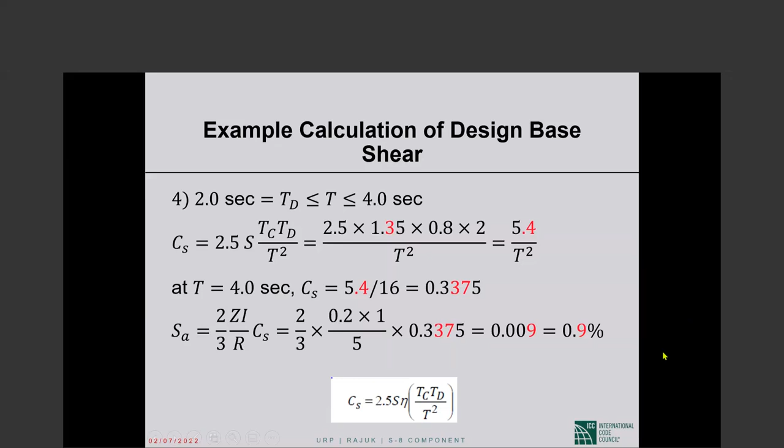Now, with the correction made, there is no difference between the BNBC number and the ASCE 7-05 number. Yesterday there was a line which I deleted that said this 0.9% is slightly different from the 0.83% we had derived by BNBC 2020. So please note that correction: BNBC and ASCE 7 give you identical numbers, as they should.

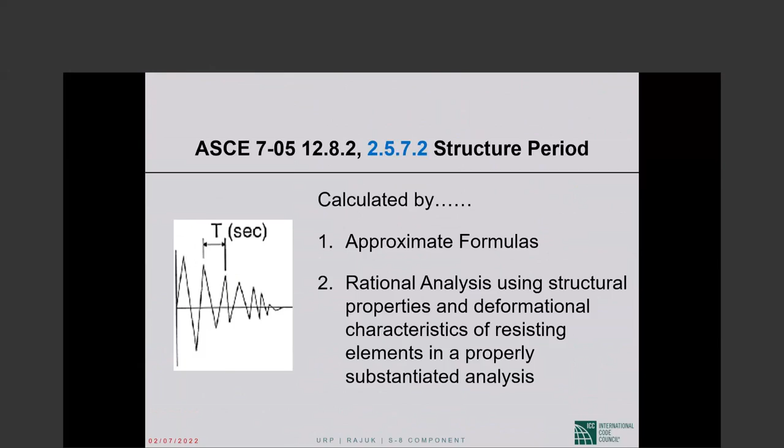Let me get to the place where we left off. This is the slide that I did not start on yesterday. Let me do it this way... I may have to go a long way back. That may not be worth it.

The base shear V is S sub A, the spectral acceleration, multiplied by the seismic weight W. The spectral acceleration S sub A, unless you are in the flat top portion of the spectrum, is inversely proportional to period or period squared. So we had to discuss the period itself.

And then in the equation for S sub A, we had R and I. So we need to discuss the R and the I coefficient. The seismic weight we have discussed already. So let us start with R.

R is given for each structure. Well, let me put it this way: in Table 12.2-1 of ASCE 7-05, a number of seismic force resisting structural systems are listed. The total number of systems is somewhere in the 70s. For each system, we are given three parameters: R, C sub D, and omega sub 0.

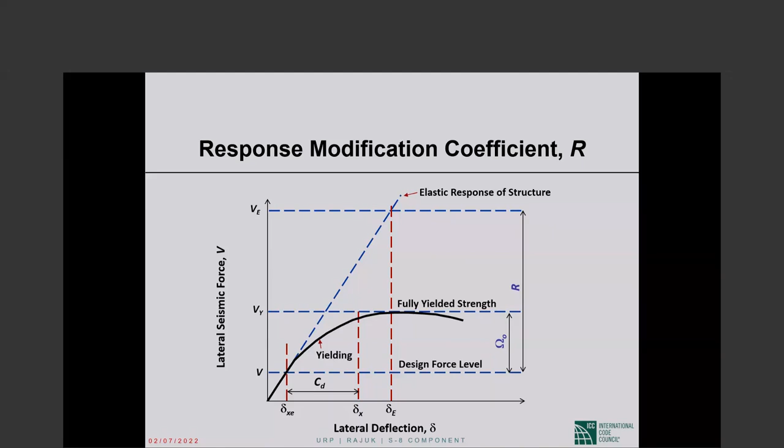So R, omega sub 0, C sub D. The R value — there are two kind of anchor values of R. Initially, those two values were set, and then pretty much all the other values were set by comparison with those two benchmark systems. That was in the early days, and now there is a lot more complication and some sophistication to it, but that's immaterial. It gives you an idea of the R values that we typically are dealing with.

R is 5 for a bearing wall system, and I defined it for you the other day — it is a system where shear walls carry gravity loads as well as lateral loads. So R is 5 for a bearing wall system with special reinforced concrete or reinforced masonry shear walls. That is kind of a benchmark value. And R is 8 for special moment frames of steel or concrete — that is another benchmark value. The other values were initially assigned by comparison with these two systems.

Is the system more comparable to moment frames than a masonry bearing wall system? Is it less deformable than a masonry bearing wall system, and so forth? So those are kind of benchmark values. The seismic force resisting structural systems — I spent quite a bit of time on the other day, so I assume that this was understood and remembered.

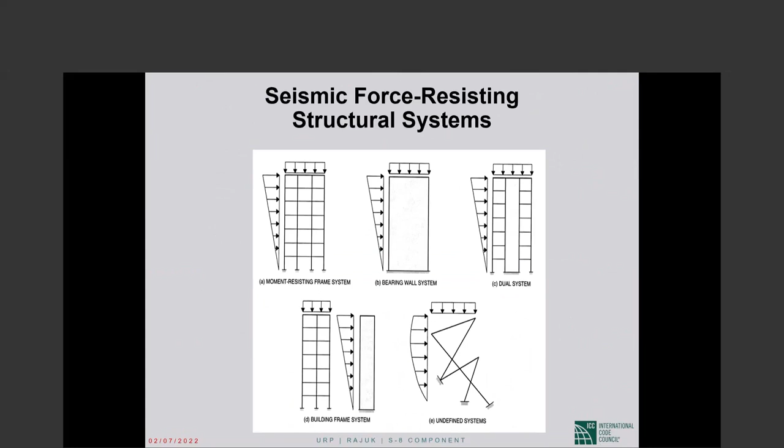We have moment resisting frame system, bearing wall system, and then combination shear wall frame systems, which can be designed as dual systems or building frame systems. Now, this is a portion of the R values table 12.2-1 of ASCE 7, which is BNBC table 6.2.19. So we have the basic seismic force resisting system. The detailing reference you could actually ignore.

Almost for all concrete systems, the reference is 14.2. Section 14.2 of ASCE 7 simply references ACI 318. So the detailing rules are to be found in ACI 318, and those rules I will discuss with you starting

tomorrow, actually. Okay. Then the R, omega sub 0, C sub D, and then there are height limits on almost all structural systems, with the exception of special moment frames of concrete and steel and dual systems utilizing special moment frames. Those are the only systems without height limits on them. Every other system has a height limit on it, and most of the time the height limits are in the higher design categories, not so much on B.

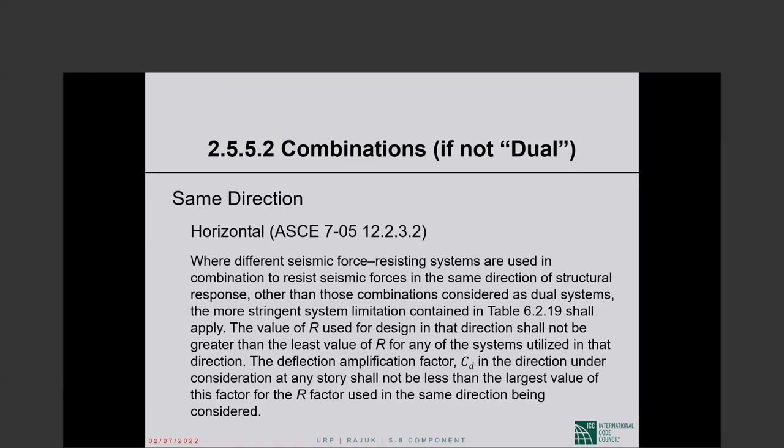In that case, you shall take the larger C sub D, or the largest C sub D, for that same R value. If you have 3 systems strung together that have the same R value, but the C sub Ds are different, you will take the largest C sub D. Okay, so this is a little bit of a tricky language.

Different systems in different horizontal directions, something like this. You have frames in one direction, shear walls in the other direction. Let us say these are special moment frames, and these are shear walls featuring special bearing wall system with special shear walls. The two directions are designed for their respective R, omega sub 0, and C sub D. There is no interaction.

At one time there used to be interaction, but for a long time we have gone by what is shown in the picture. In the bearing wall direction, we have R of 5, C sub D of 5, omega sub 0 of 2.5. In the frame direction, we have R of 8, C sub D of 5.5, omega sub 0 of 3. Very simple.

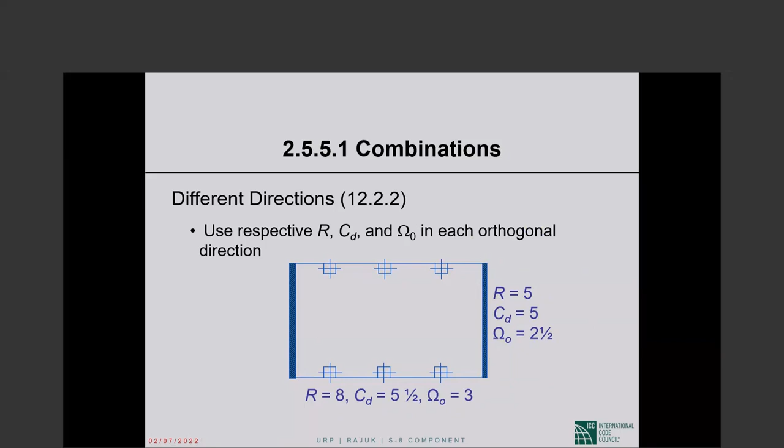The two orthogonal directions are independent of each other. The vertical combination of structural systems gets a little complicated. I didn't go there to save on time, but you can read up, or if you ask me, we will discuss that.

The importance factor I is 1.0 for risk category 2. It is, in your case, not risk category, it's occupancy category. I didn't notice that.

However many times I go through the slide sets, this always happens, and this always bothers me.

Occupancy category 2, which is standard occupancy, office buildings, apartment buildings, I is 1. The unimportant structures at occupancy category 1, the importance factor is also equal to 1. There is no importance factor smaller than 1. Category 3, essentially assembly buildings where a lot of people congregate in one space at one time, I is 1.25. And category 4, essential facilities, hazardous facilities, I is 1.5.

Now that gives us everything that goes into the design base shear equation. Having calculated the design base shear, we will, as I said, distribute it along the height of the structure in the manner prescribed by the code.

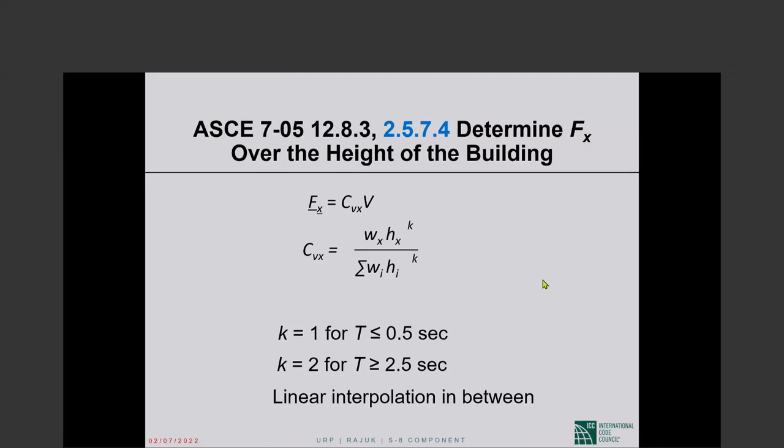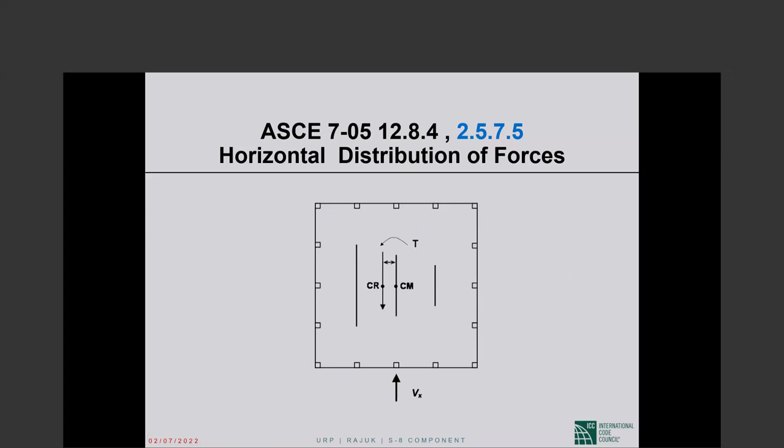The picture is simplified in the sense that torsion will not only go to these elements in the up-down direction; some of the torsion will be resisted by those frames too, which I did not indicate in the figure. So it's a simplistic figure, but the point I'm trying to make is made with it. So torsional moment due to difference in location of center of mass and center of rigidity must be considered for rigid diaphragms. Now, when the center of mass and center of rigidity coincide and there is no actual torsion, now called inherent torsion, we still consider an accidental torsion if our diaphragm is rigid.

The accidental torsion is the story shear multiplied by 5% of the plan dimension perpendicular to the story shear.

There was a time, a long time ago, when we used to design for the actual torsion subject to a minimum of the accidental torsion. But those days are long gone. We have for a long time been designing for the actual torsion plus the accidental torsion.

Not only that, the accidental torsion many times has to be amplified. For structures assigned to design category C, D, E, or F where type 1A or 1B irregularity exists—that's torsional and extreme torsional irregularity—ASCE 7-05 requires that the torsional and accidental torsional moments be amplified by a torsional amplification factor that can be up to 3.

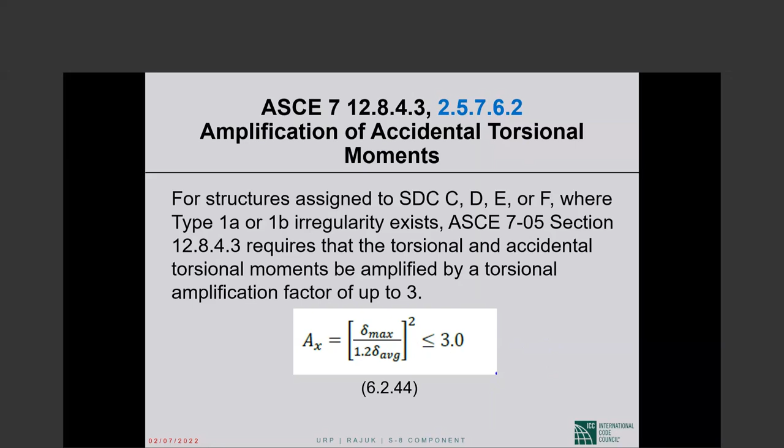Delta maximum is the maximum lateral deflection of the lateral force resisting system. Delta average is the average lateral displacement. This expression is pretty simple, and you will see a lot of this delta maximum and delta average in the next segment on irregular structures, so it will be very clear what A sub x is. It can be up to 3.

Overturning moment is simply the forces at the various floor levels multiplied by their height. If we are looking at overturning moment at the base, the overturning moment is the forces at the various floor levels multiplied by their heights above the base, as simple as that.

Now, the foundations of structures, except inverted pendulum type structures—this is like a water tank where all the mass is at the top—shall be permitted to be designed for 3/4 of the foundation overturning design moment M sub 0 determined using... so this is a fairly significant break that you get.

Foundation design does not have to be for the overturning moment at the base. At the soil-foundation interface, you can take a 25% discount on that. This is in ASCE 7-05 as well, section 12.13.4, this discount for foundation design.

That brings us to a major topic, one of the last—this is not the last in seismic, in the equivalent lateral force procedure, and some of these things extend beyond the procedure. In seismic design, we have drift check. The interstory drift, and I'll define it in a second, shall be within tolerable limits.

So, delta sub XE and Q sub E. The delta sub XE multiplied by C sub D gives us the estimated design earthquake displacement, as I mentioned. So delta sub X is C sub D times delta sub XE, but it is a little bit more than that. In delta sub X, we divide C sub D delta sub XE by the importance factor I.

We do that because we are going to check the interstory drift under drift limits, and the drift limits are a function of the occupancy of the structure. The drift limit for a hospital is half that for an office building. We should not penalize a hospital twice, once by instituting a tighter drift limit, and again by using an I factor of 1.5, thereby increasing the forces under which we calculate the drifts. So we take I out of the picture. Delta sub X is C sub D times delta sub XE divided by I.

That delta sub X at the top of a story minus the same delta sub X at the bottom of the same story is the interstory drift, delta sub X, in story X. That has to be less than or equal to the allowable story drift, delta sub A. The delta sub A is given in Table 12.12.1 of ASCE 7, Table 6.2.21 in BNBC 2020.

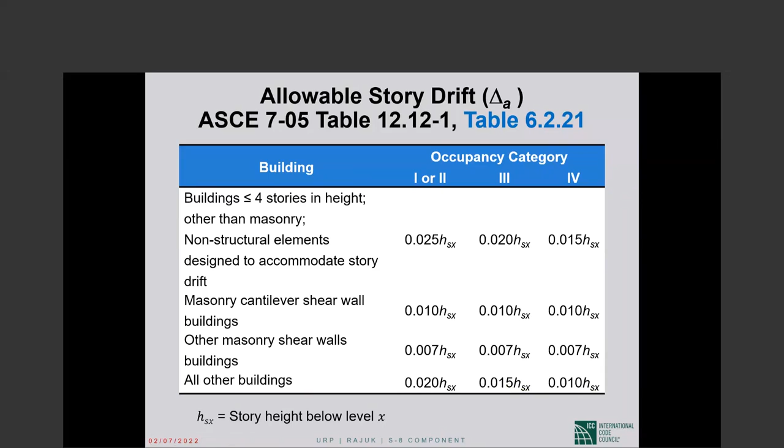Okay, the last topic. I am way behind, it's approaching one hour and I'm not done with what was supposed to be covered yesterday. So what will happen to today's segment, I don't quite know yet. We'll see. The time problem is just a problem, but we have to cover the material.

Okay, the strength design load combinations I discussed at length, one of these days, the days have gotten mixed up. These are the strength design load combinations of ASCE 7-05 and BNBC 2020, the same load combinations where we have eliminated F, the fluid pressure, H, the horizontal earth pressure, and T, the temperature effect. So these are the strength design load combinations of the code.

Two of the load combinations have earthquake effect E in them. This is what I call the additive seismic load combination. The gravity causes negative bending moment at a support section, and earthquake also causes negative bending moment. If we want to figure out the largest negative bending moment at that section, we will use that load combination. Gravity adds to the effects of earthquake.

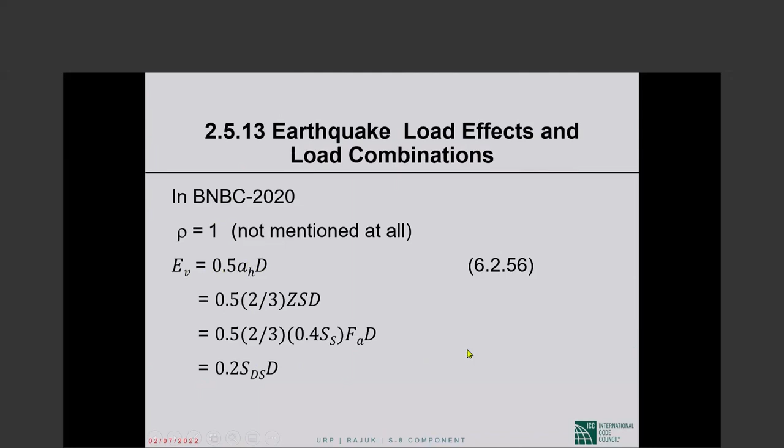In design categories D, E, and F, rho can be 1 or 1.3, as I mentioned already. So in Bnbc, I mentioned that rho is 1. E sub v is written that way, and I have explained why that is exactly equal to that. I wouldn't spend time on the details, it's very clearly spelled out.

So in the additive load combination, when we write E is equal to Q sub E plus 0.2 S sub ds times D, and we collect terms, what we have done is we have increased the dead load factor from 1.2 to 1.2 plus 0.2 S sub ds. So if S sub ds is equal to 1, we have made the dead load factor 1.4 by considering vertically downward earthquake forces.

If you take the example of Dhaka, which is zone 2, soil type S sub D is quite common, particularly on the north side. S sub ds then is 0.45. This value is given in Appendix C. For S sub ds of 0.45, 0.2 S sub ds is 0.09, and the dead load factor becomes 1.29, as you see here.

So in Dhaka, structure shall be designed for this load combination. The load factor on live load, I have mentioned repeatedly before, is 0.5 unless you are designing a parking structure, a place of public assembly, or an area supporting more than 100 pounds per square foot of live load. That's what is said here.

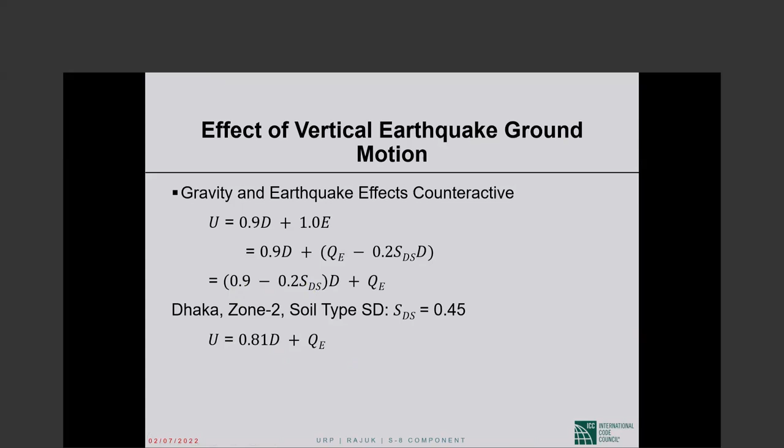This is pretty much the final topic before I go to today's session. There are the regular load combinations that we saw, and then there are load combinations with overstrength factor, as they are called, in ASCE 7 as well as Bnbc 2020. Overstrength factor load combinations.

The first and foremost and most important thing I am going to tell you about the load combinations with overstrength factor is they must be used where required by ASCE 7 or Bnbc 2020, but more importantly, they must not be used where not required by the code. You cannot just willy-nilly use them at your whim. That will be to the detriment of your structure. So these load combinations with overstrength factor shall be used where required and shall not be used where not required. The second part is more important than the first part, I would say. Please do not use them where they're not required.

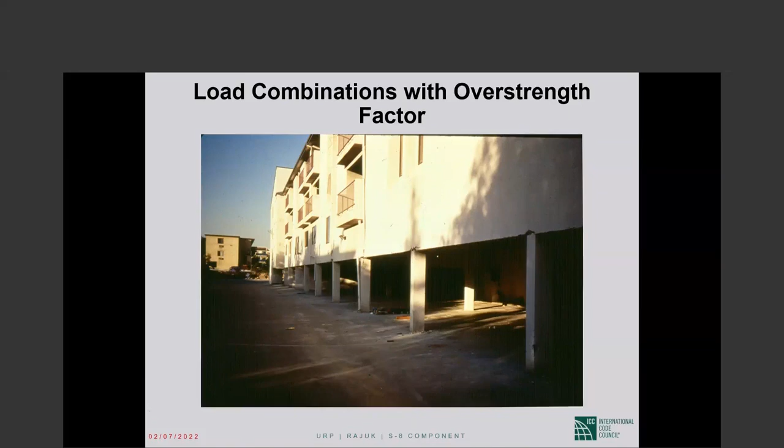This is the famous Olive View Hospital after the 1971 San Fernando earthquake. I showed you a picture the other day where the ambulances were pinned down by the canopy that had fallen on them. This is a side face of the building or whatever.

These columns are supporting stiff shear walls above, as you can see very clearly. The only reason the building is standing up is that, for reasons unknown to me, the central columns were spirally reinforced with a very tight pitch to the spiral. So those columns were inelastically deformable and are holding the building up.

These columns are typical of pre-1973 UBC construction: plenty of longitudinal steel, but no transverse reinforcement, or very little. So those columns have completely failed, as they are expected to.

Today's design, all four of those columns, will be designed for overstrength using load combinations with overstrength factor, and the entire length of the column will be detailed for ductility. We will have special detailing. We do both of those things, and so in two different ways, columns supporting discontinued shear walls today are much superior to what we used to build before 1973.

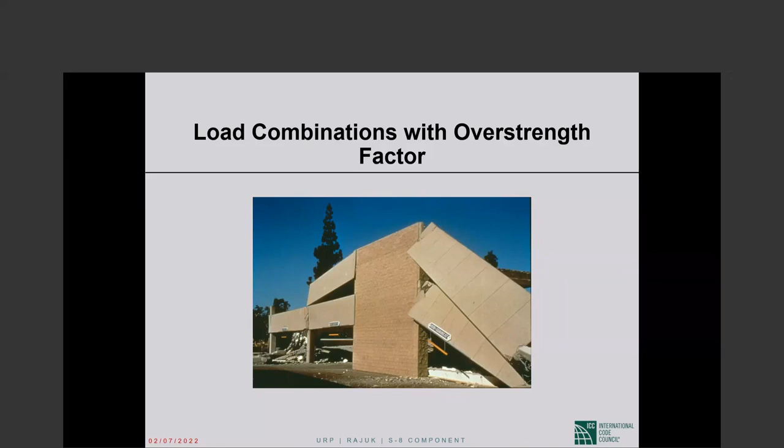From that point on, this was 94, 97 UBC, we already required collector elements to be designed using what we used to call special seismic load combinations back in those days. This is vitally important: collector elements need to be designed using the load combinations with overstrength factor. These are the special seismic load combinations, or load combinations with overstrength factor, as we call them now.

This is the same as the regular load combinations, except here we have omega sub 0 rather than rho, the redundancy factor. The redundancy factor is 1 or 1.3 if your seismic design category is D, E, or F. Omega sub 0, on the other hand, is given in the R values table, and if you look at the table, the number is 2, 2.5, or 3. So we are amplifying the effect of design base shear by a much larger multiplier and then adding to gravity effects.

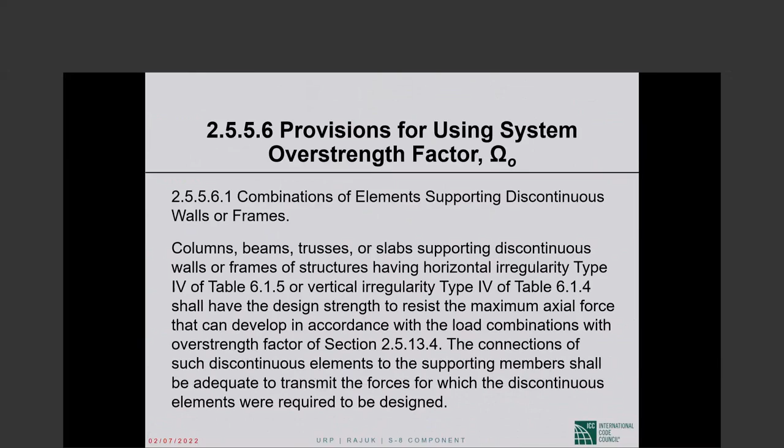So this is the difference between regular seismic load combinations and the load combinations with overstrength factor. Where does the BNBC require you to use special seismic load combinations? As I said, the cantilever column base is not there, but elements supporting discontinuous walls or frames is very much there. I will not read the text, but the important thing is it's there.

Then this talks about collector elements in a roundabout way. There is a 25%... anyway, all of this will come up. I think maybe in the next segment we will discuss what is said here, but not now. This is telling you that the collector elements, in a roundabout way - you'll be very confused if you read it - but it is essentially telling you to design the collector elements using the load combinations with overstrength factor.

Actually, this is much more so. This section I will discuss later, and when I do, I will refer back to the section of BNBC. I will tell you that this is what I kind of skipped. This tells you to design the collector elements using load combinations with overstrength factor.

And then something that is not in ASCE 7, it is in the IBC: batter piles, which are inclined piles. Batter piles and their connections shall be capable of resisting forces and moments from the load combinations with overstrength factor. So batter piles you shall also design using load combinations with overstrength factor.

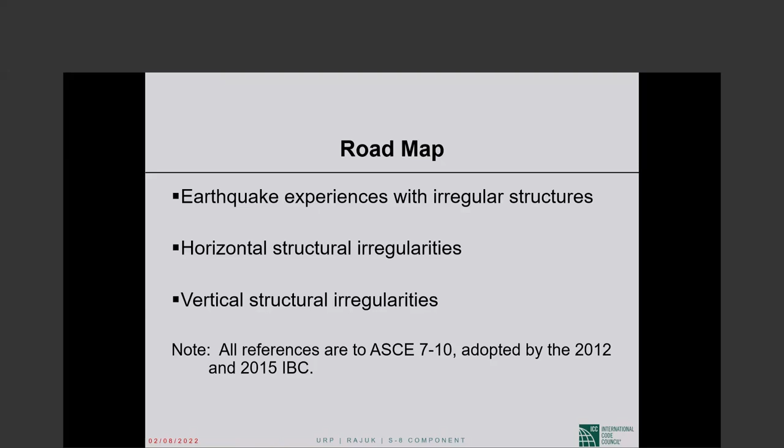ASCE 7-10 was adopted by 2012 and 2015 IBC. I did that because there were some beneficial changes or clarifications made in ASCE 7-10. It's not very different from ASCE 7-05, but a couple of things were improved, so I thought that it was preferable.

Configuration: the word means a relative arrangement of parts, something produced by such arrangement. This is the dictionary meaning - relative arrangement of parts, something produced by such arrangement.

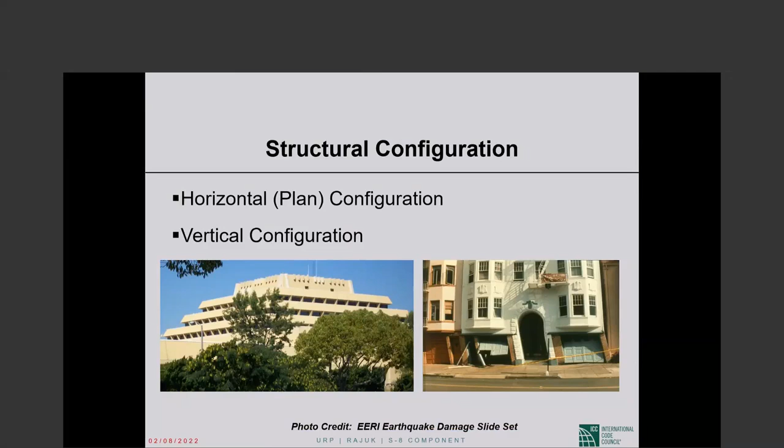In the structural design we do, the plan configuration of a structure and the vertical configuration of a structure, how a structure is put together in the horizontal direction and how it is put together in the vertical direction, both matter. Both become pretty important, so we consider both.

The configuration of a structure can significantly affect its performance during a strong earthquake that produces the ground motion contemplated in the IBC and ASCE7, same as BNBC 2020.

The picture shows the Ministry of Transportation and Telecommunication, Mexico City. I showed you this picture the other day. This was in the wrong height range, so it was kind of a resonant response, but the L shape of the building did not help. That meant a lot of torsion, which always hurts.

ASCE7 seismic design provisions were developed basically for regular buildings. This is something we need to understand—everything was developed basically for regular buildings. Past earthquakes have repeatedly shown that irregular buildings suffer greater damage, incomparably greater sometimes than regular buildings. This happens even with good design and construction. It is the configuration that is the problem, not the design and construction. By proper design and proper construction, you can improve things, but the problem remains.

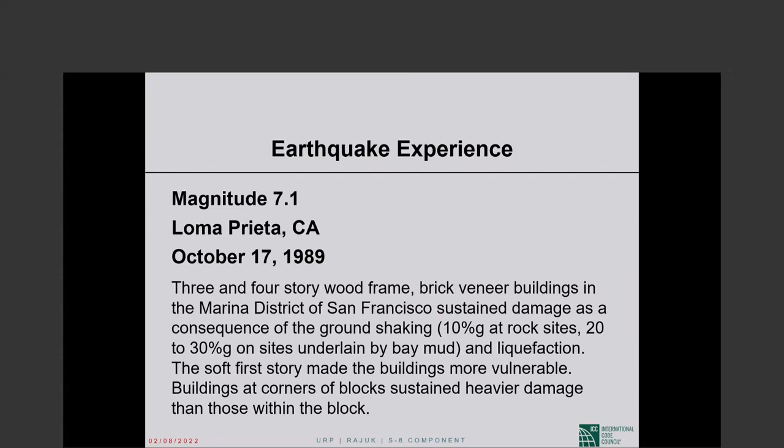So irregular buildings attract more damage to themselves. Some examples: the so-called Loma Prieta earthquake of 1989. This was the San Francisco area earthquake, the last significant one in that area, magnitude 7.1.

What we saw in that earthquake—this is the Marina District as it is called. This was built on fill. These buildings, when they were built, there were no automobiles, so there were no garages. When cars came, people created openings in the ground story to have garages. The garages were created by removing walls after the buildings had been constructed, and that produced soft stories. These buildings with soft stories did not do well at all in the Loma Prieta earthquake, as you would imagine. So the irregularity was the problem.

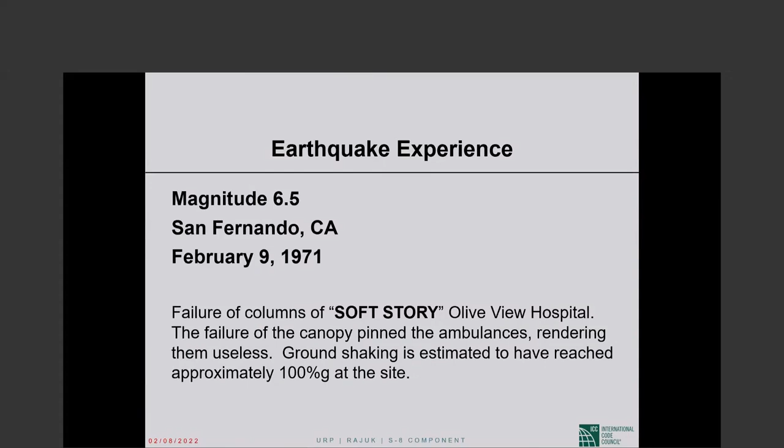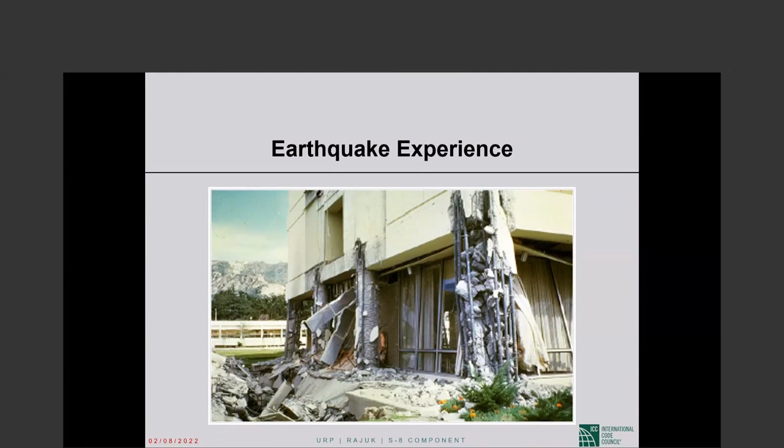This is the San Fernando earthquake that you keep hearing about, 1971. This is the building that I just showed you, the other face, the left face. These are the ambulances that were pinned—this canopy fell on the ambulances. But I just showed you this picture. The problem was the soft story, the columns supporting the discontinued shear walls. If the columns had been designed and detailed properly, the building probably would have stood up. That's besides the point. The point is that the irregularity poses a challenge—it causes a problem that has to be addressed.

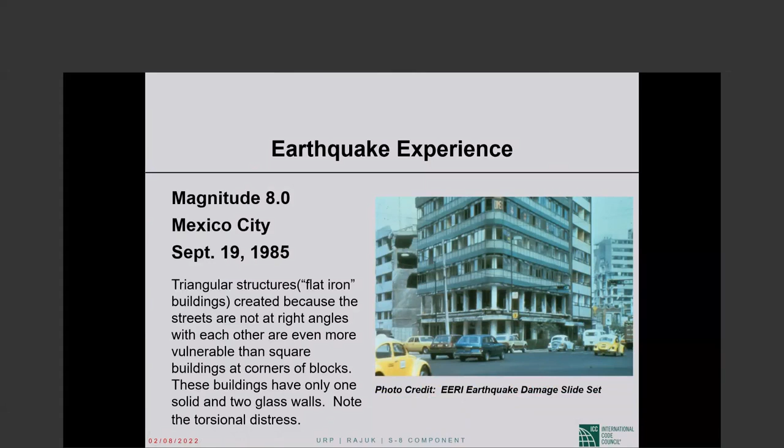Mexico earthquake, 1985. The earthquake—which earthquake—is incidental; the building is what matters. This is even worse. This is a triangular building, so only the back face has walls. The other two faces do not have walls. They are much more flexible, and the resulting torsion causes a lot of problems for these buildings.

You can design against it, but the problem is very real. In a regular structure, inelastic demands produced by strong ground shaking tend to be well distributed throughout the structure, resulting in a dispersion of energy dissipation and damage. That is a very key thing to understand. In irregular structures, inelastic behavior can concentrate in the zone of irregularity, resulting in a rapid failure of structural elements in these areas. This is the difference between regular and irregular buildings.

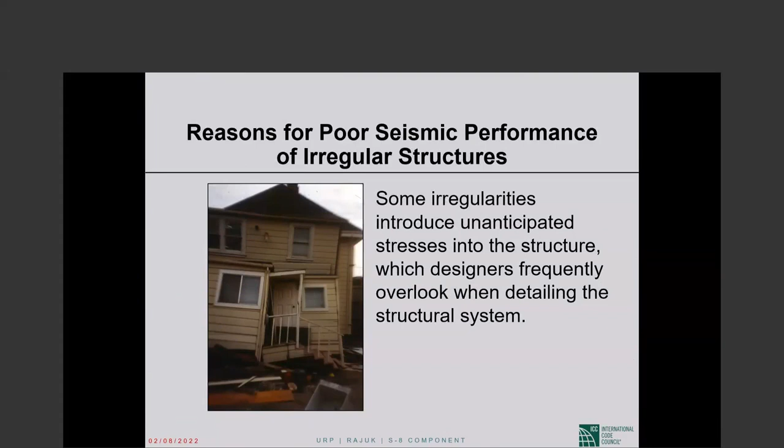Some irregularities introduce unanticipated stresses into the structure, which designers frequently overlook when detailing the structural system. This is a building out of Japan, I believe, after the Kobe earthquake. That's where I think I took that picture.

So, reasons for poor seismic performance of irregular structures: elastic analysis methods, which is what we almost always use as the basis of design, whether static or dynamic, doesn't make a difference. Elastic analysis methods typically employed in structural design often cannot predict the distribution of earthquake demands in an irregular structure very well, leading to inadequate design in the zone of irregularity.

Consider the building with the two open faces and two back faces with walls that I mentioned. When the shear wall is damaged, the structural behavior is not regular anymore. So how would you find out from elastic analysis what is happening subsequently to the shear walls, and more importantly, to the columns? You cannot—there is no way you can figure out the actual force distribution after the behavior of the structure has become inelastic.

The code regulations concerning irregular structures were introduced in the 1988 edition of the Uniform Building Code. The types of irregularities that you see date back to then. There have been a couple of modifications, but only a couple. This has been a very stable part of the code.

The way ASCE 7 handles it, we have definitions, and then there is a table that tells you, if you have, let's say, torsional irregularity, which particular sections of ASCE 7 get triggered. So if you have torsional irregularity, the table will tell you to go to the section that has restrictions on analysis procedures. And when you go there, you will see that you have to do dynamic analysis—static analysis will not do, for instance.

Okay, I want to take you through all of that—what is the definition, and what does ASCE 7 ask you to do if you have that particular type of irregularity.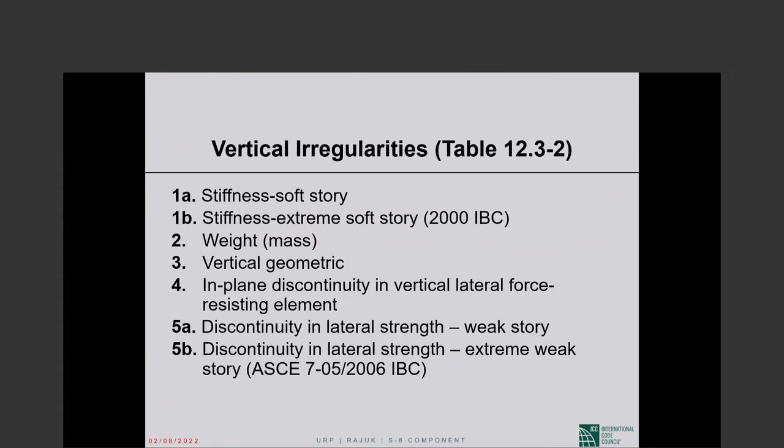The vertical irregularities are: stiffness irregularity, extreme stiffness irregularity, soft story, extreme soft story, weight irregularity, vertical geometric irregularity, in-plane discontinuity, discontinuity in lateral strength or weak story, and extreme weak story. In our seismic design code master, I wanted to show how much space we have devoted to this topic of irregular structures—it is that important.

So we will start with the very first type, 1A, torsional irregularity, and look at the definition and also what ASCE 7 requires us to do when we have torsional irregularity.

So, the definition: this is the undeformed structure, and this is the structure after the earthquake has caused displacements and so forth. The maximum displacement is at this corner, denoted by delta maximum, and delta average is the average displacement of this corner and that corner. If the maximum is less than or equal to 120% of the average, we don't have any torsional irregularity—it is considered a regular structure.

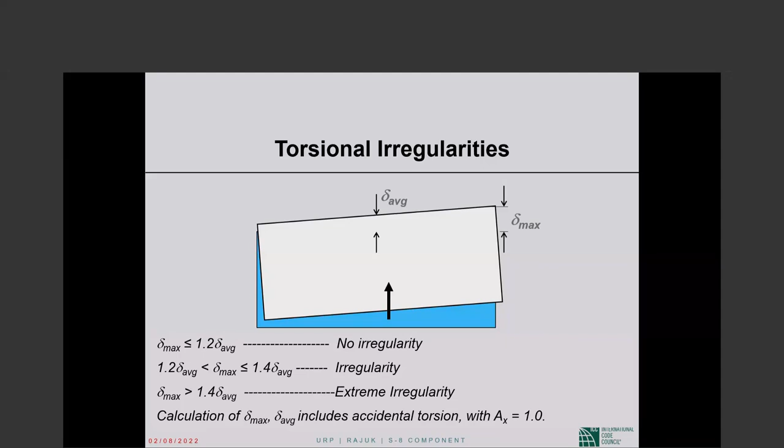If the maximum is between 120 and 140% of the average displacement, then we have torsional irregularity type 1A. If delta maximum is larger than 140% of delta average, we have extreme torsional irregularity. So we have defined torsional irregularity 1A and extreme torsional irregularity 1B with this one picture: up to 1.2, no irregularity; between 1.2 and 1.4, type 1A; above 1.4, type 1B.

Same thing with an L-shaped building, same idea. Delta A is now the maximum, and the average is delta A plus delta B divided by 2. If this condition is true, then we have type 1A irregularity as shown in this picture.

If we have 1A irregularity, then those are the provisions of ASCE 7 that get triggered—we have to abide by all of those requirements. The requirements sometimes apply only to certain seismic design categories, not all. This requirement applies in seismic design categories D through F; this one, however, B through F. So that column is kind of important.

Now here comes the long paragraph in the NBC.

Before, when we were discussing collectors having to be designed for load combinations using the overstrength factor, there was a paragraph I said would come up later, and this is now that later. This says 25% increase in seismic forces in connections, diaphragms and collectors. There is somewhere else where you will get more elaboration on that. I don't remember exactly now, I have 7 or 8 seismic segments I was preparing.

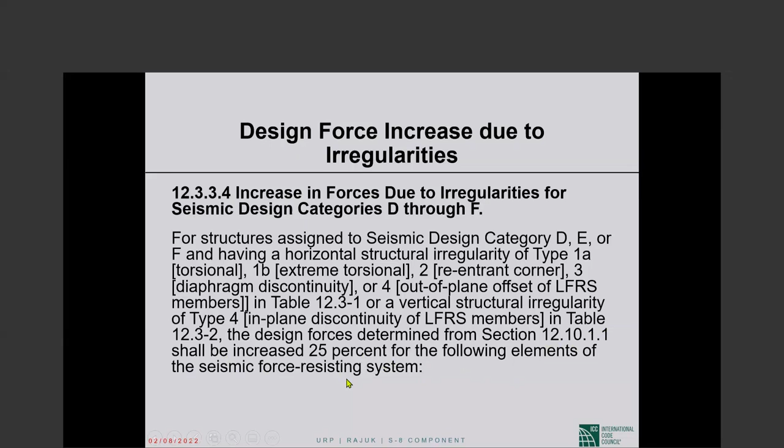The design forces determined from section 12.10.1.1 shall be increased 25% for the following elements of the seismic force resisting system. This is what I wanted you to see. So where do you have to increase the design forces by 25%? Connections of diaphragms to vertical elements and collectors.

The very nice picture, this was in the previous segment. Do you remember the picture of the diaphragm I showed to explain what collectors are? So the diaphragm is connected to the collector where there is no shear wall. The diaphragm is connected to the shear wall where there is a shear wall. Connections of diaphragms to vertical elements, meaning shear walls or frames, and to collectors - those connections have to be designed for 25% more forces. And then the collectors themselves, and their connections, including connections to vertical elements of the seismic force resisting system, the collector to shear wall connection.

Now, there is a significant exception: forces calculated using the seismic load effects including the overstrength factor. So if you are in design category D, the collectors and their connections have to be designed using the load combinations with overstrength factor, and in that case the 25% requirement goes away - it is not on top of omega sub zero. So most of the time, at least that part of the requirement will be moot in design category D.

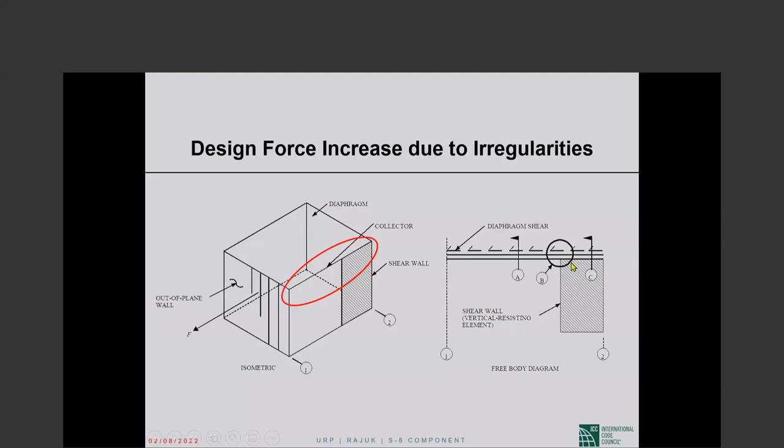So this is the diaphragm to collector connection, A. This is the collector to shear wall connection. I'm sorry, let me correct myself - this is diaphragm to collector connection, this is the collector to shear wall connection, and this is the diaphragm to shear wall connection. Are you with me? This is diaphragm to collector connection, this is collector to shear wall connection, and this is the diaphragm to shear wall connection - A, B, and C.

So A is diaphragm to collector connection, as shown in the picture - this is the collector, this is the diaphragm, the design forces have to be increased 25%. This is the collector to shear wall connection, so this connection, the forces have to be increased 25%. And this is the diaphragm to shear wall connection - this is the shear wall, this is the diaphragm, this connection has to be designed for 25% higher forces.

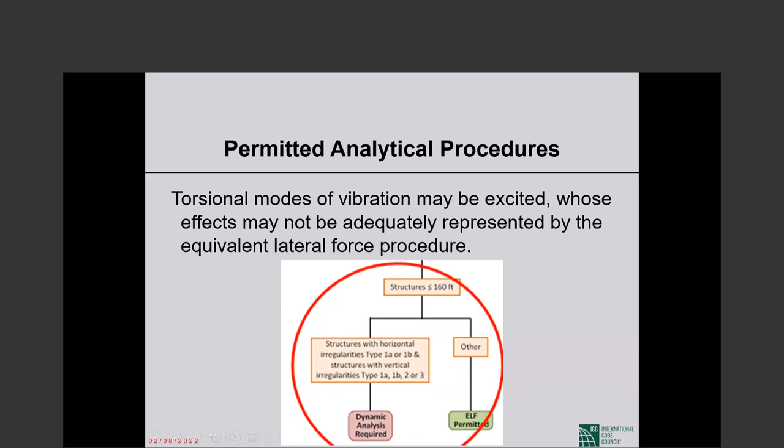Okay, second thing you have to look at, if you go back to the table - and I won't go back every time, but first time - the next thing you have to look at is table 12.6-1, which is the permitted analytical procedures. We went over that yesterday. If you have torsional irregularity 1A or 1B, that is one of the bad irregularities that will trigger dynamic analysis even for shorter buildings. So if you have torsional irregularity, you have to look at this table and do dynamic analysis, because torsional modes of vibration may be excited whose effects may not be adequately represented by the equivalent lateral force procedure.

You just saw that picture explaining torsion, and I had this page on the amplification of accidental torsion. The first thing is a 25% increase. Second, look at the table of permitted analytical procedures. Third is the amplification of accidental torsion. This is required for type 1A and 1B buildings.

So this is another section that is triggered, 12.8.4.3. You have to design torsionally irregular buildings for the inherent torsion plus the accidental torsion amplified by the torsional amplification factor given here, and that factor can be up to 3.

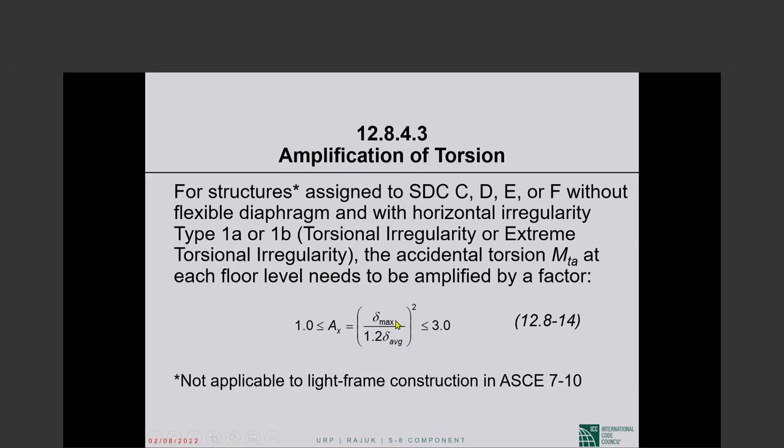By now you know delta maximum and delta average very well. So this is just illustrating delta maximum and delta average and the definition of the accidental torsion amplification factor, or the torsional amplification factor. I don't know why it's called accidental.

The next section that is triggered is 12.8.6. What this covers is, if you have torsional irregularity, interstory drift. Interstory drift, remember, is deflection at the top of a story minus deflection at the bottom of the story. Typically, we calculate the deflection at the center of mass. But that is not good enough if you have significant torsion.

So for structures assigned to seismic design category C, D, E, or F having horizontal irregularity 1A or 1B, which would indicate significant torsion, the design story drift shall be computed as the largest difference of deflections of vertically aligned points at the top and bottom of the story under consideration along any edges of the structure.

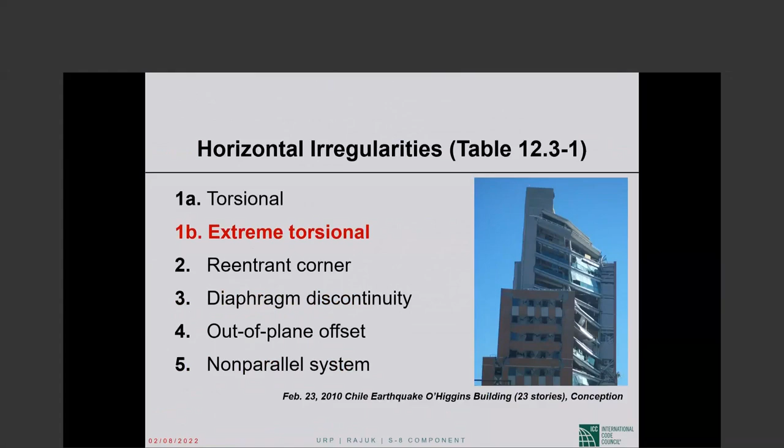So that was the entire table. This is the same table, I'll go back, I'm not skipping. We looked at the 25% increase, the permitted analytical procedure, and the 3D structural model requirement. There's nothing more to elaborate on that. If you have torsion, you need a 3D model—2D simply doesn't do it. That should be kind of intuitive.

Amplification of accidental torsion, we talked about. Design story drift based on largest difference in deflection along the edges, we just talked about. The last item says that even when you do nonlinear time history analysis, you will have to do 3D—2D will not be sufficient anymore.

Okay, we go from type 1A to type 1B. Now the maximum is more than 140% of average. This irregularity is prohibited in seismic design category E and F. You do not have that in Bangladesh, so you don't have to worry about it. But in near fault areas, this is simply not allowed to be built.

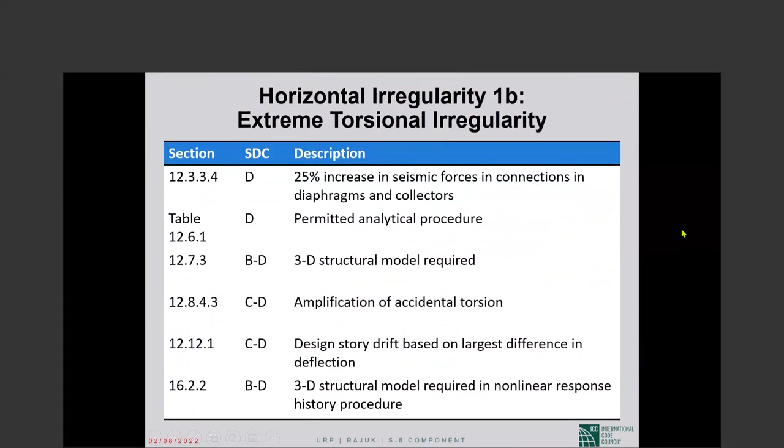The same restrictions apply, the same table—1A and 1B, no difference. The difference is that outright ban: you cannot do it in near fault areas, in seismic design category E and F.

This probably goes into a little too much detail, a supplement to ASCE 7-10. ASCE 7 says that the redundancy factor rho shall not be taken equal to 1 for structures assigned to seismic design category D having extreme torsional irregularity—rho shall be 1.3. I won't go beyond that. This goes into ASCE 7-10 supplement material for you, for the future.

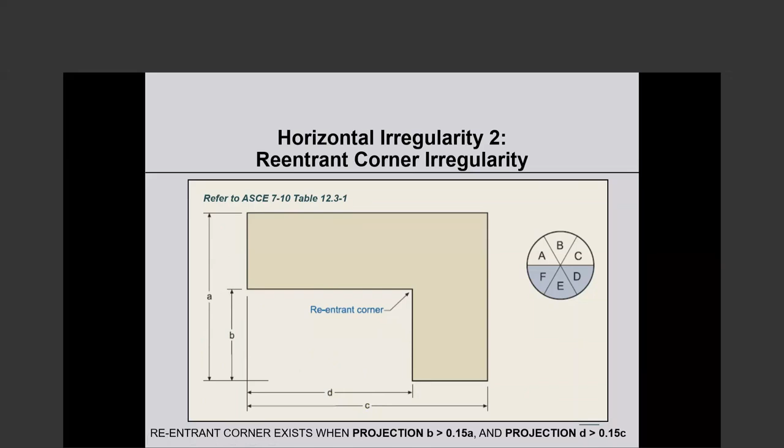Okay, re-entrant corners—something that looks like this. A re-entrant corner exists when projection B, this distance, is larger than 15% of A. So look at A, look at B. If B is larger than 15% of A and D is larger than 15% of C, then you have re-entrant corner irregularity. This is the definition, and these are the restrictions.

The 25% increase in seismic forces in connections and diaphragms, and the permitted analytical procedure—if you have horizontal type 2 irregularity, that is a bad irregularity, and you will have to do dynamic analysis even for shorter buildings.

The re-entrant corner irregularity—why we are so careful with it—is that re-entrant corners may form coupled wings which may respond in an opening and closing fashion. That is very easy to visualize. This may give rise to high stresses in the vicinity of the re-entrant corners.

Diaphragm discontinuity irregularity exists when the area of opening is larger than 50% of the area of the diaphragm, or effective diaphragm stiffness changes more than 50% from one story to the next. This effective stiffness is not defined, which makes it a bit of a problem. But anyway, that's the significant change in diaphragm stiffness from one story to the next.

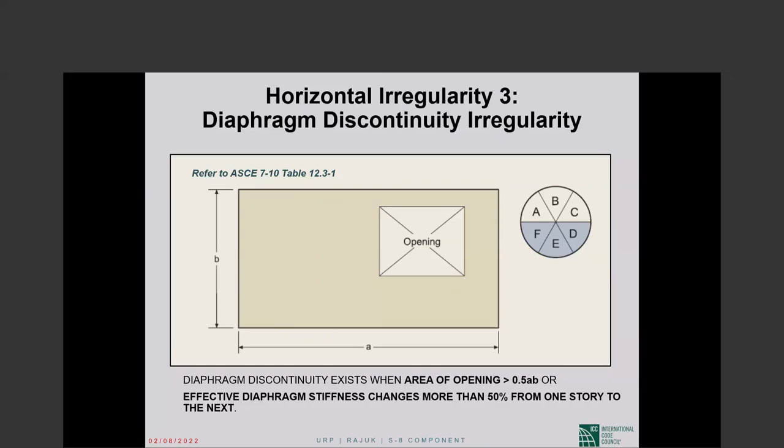This irregularity is not very well defined, and it has undergone changes in subsequent editions of ASCE 7 that I cannot go into today. But in ASCE 7-05, you will see exactly what you see here. No change from 7-05 to 7-10. So 50% or more of the diaphragm is an opening, or effective diaphragm stiffness changes more than 50% from one story to the next. What you consider effective is up to you. If you have diaphragm discontinuity, the regulations triggered are again a 25% increase in seismic forces and the permitted analytical procedure.

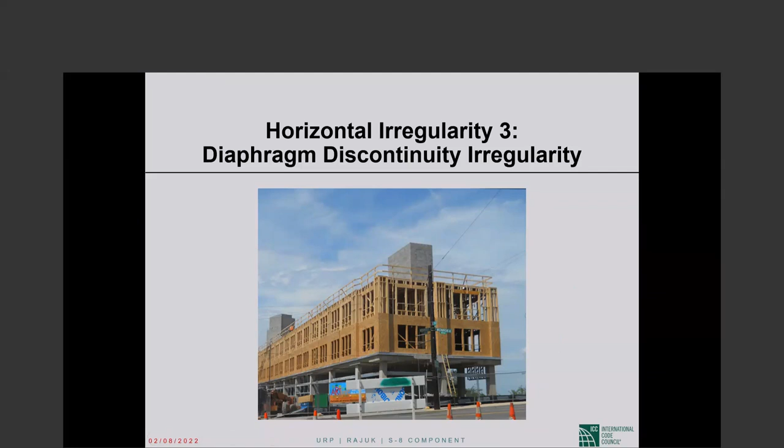Diaphragm discontinuity irregularity, continuing with our discussion. This is very, very common now in the US: a wood structure sitting on a concrete podium structure, as they are called. This concrete structure is not as stiff as they usually are, but the point is that this diaphragm is concrete, while those diaphragms are made of wood, and you definitely have more than 50% change in stiffness. So we are looking at this diaphragm discontinuity irregularity.

These are questions that we got from wherever. If the roof diaphragm has an opening in it, which results in the stiffness of the second floor diaphragm being 50% stiffer than the roof, does that make it irregular? The plan irregularity definition says story to story. We said yes, it would be considered irregular. It doesn't matter whether it's floor or roof.

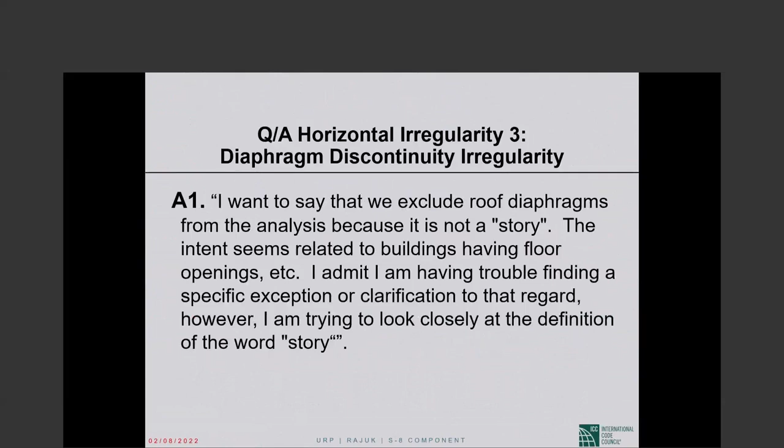The question and answer I think I'm going to skip in view of our time situation. You can easily read them. And sometimes the context is probably a little too American, may not apply to you. The second question we spent a lot of time on, because this is an important question here.

In office buildings, the floors are typically steel. Well, first of all, many office buildings are made of steel, and the floors are steel decks topped with concrete. But the roof level steel deck is typically not topped. We're not going to do anything on the roof anyway, so there's no reason to put a concrete topping. So are all those buildings irregular? The untopped roof diaphragm is definitely much less stiff than the topped floor diaphragms. Are all those buildings irregular? Opinions are expressed that you can read. And that situation probably does not exist in Bangladesh, at least to a significant extent, so don't worry too much about it.

Next, type 4 is out-of-plane offset irregularity, and I think the pictures are quite clear. ASCE 7-10 clarifies that at least one of the vertical elements has an offset, so there is discontinuity in vertical elements of the lateral force resisting system.

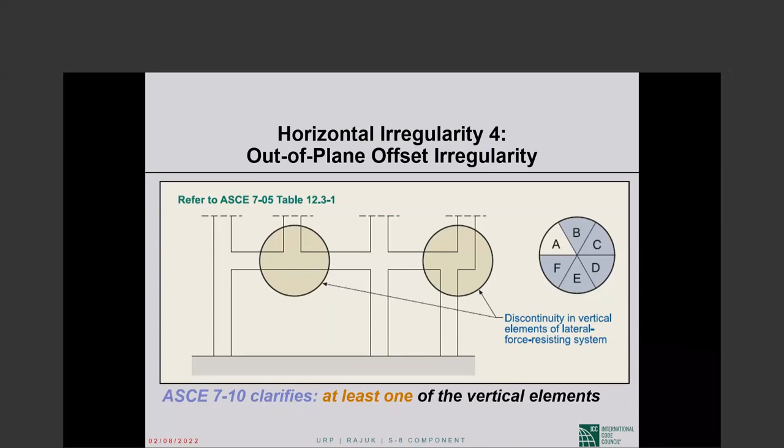This is a very graphic picture that comes from FEMA, and it makes an important point. This shear wall was coming down, but then it makes an offset and comes down a different line. Now this shear has an opposite shear at the base of the wall, and that shear will have to go from here to there through the diaphragm. So there will be this shear, there will be that shear, and then there will be shear in the diaphragm.

The diaphragm shear - this is called a transfer diaphragm when this happens, when the diaphragm has to transfer the shear from the base of this wall to the top of the continuing wall. This transfer diaphragm has to be treated properly in design, and those transfer forces have to be treated properly. But anyway, this is out-of-plane offset irregularity.

This is a nice looking building where you have a very significant offset of the seismic force resisting system. This wall was coming down, and I don't even know where it's continuing along this line or anyway - so there is discontinuity in that shear wall.

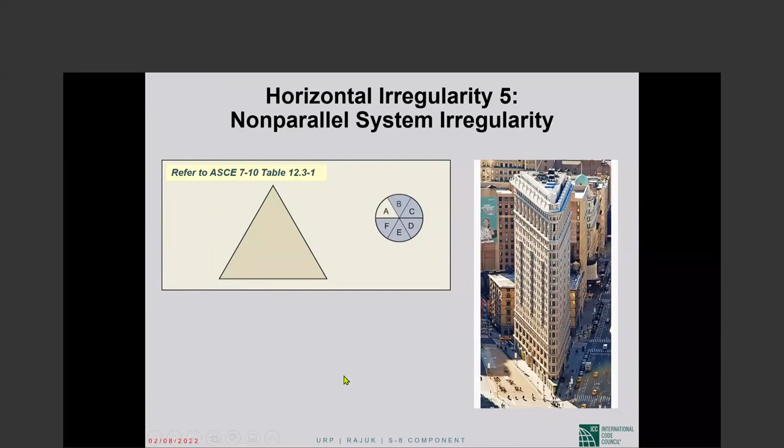This building, I do not know what the system is, but if you have a triangular shear wall in a building, that would be non-parallel seismic force resisting system. The definition is: non-parallel system irregularity exists when the vertical lateral force resisting elements are not parallel to the major orthogonal axis of the seismic force resisting system.

It used to say 'or symmetrical about,' and that was deleted in ASCE 7-10, which is the main reason I went with ASCE 7-10. This is very important - 'or symmetrical about' didn't make any sense whatsoever. You still have it in BNBC. Do not use it, I consider it deleted, doesn't make any sense. Non-parallel system irregularity exists when the vertical lateral force resisting elements are not parallel to the orthogonal axis.

When you have non-parallel system irregularity, we have to use orthogonal load combinations. I need to go into that. This is something else that is not covered in BNBC, but I'll cover it right here, not another day.

Permitted analytical procedure, whether you have to do dynamic analysis or equivalent static, we will do. A 3D structural model would be required, whether you do regular analysis or nonlinear time history analysis.

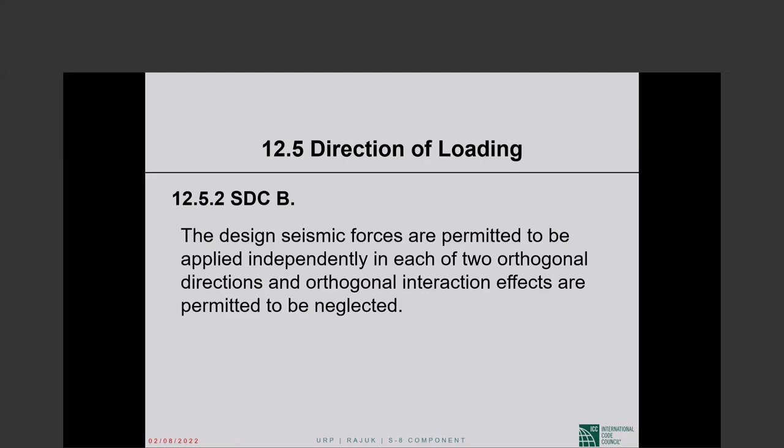Design category C: what is true of design category B is also true of design category C, and something else is true. So design category B, independently in each orthogonal direction, was fine. Design category C, that is still fine unless you have a structure that has horizontal irregularity type 5, non-parallel seismic force resisting systems that we are discussing. If you have that...

Even in seismic design category C, you shall use one of the following procedures. The first procedure is the orthogonal combination procedure: equivalent lateral force, modal response spectrum, or linear response history analysis, with loading applied independently in any two orthogonal directions. So you analyze your building independently in any two orthogonal directions.

Under the code prescribed seismic forces, and then you design the structural elements for 100% of the effect of the X earthquake plus 30% of the effect of the Y earthquake, or 30% of the effect of the X earthquake plus 100% of the effect of the Y earthquake, whichever is the worst of the two.

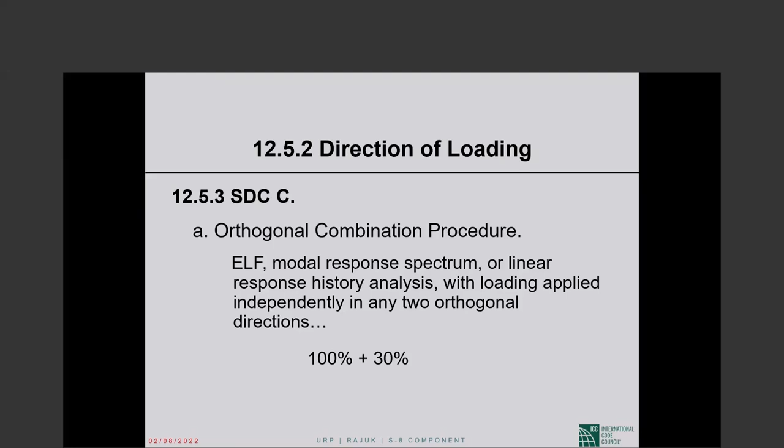So let us say a column of the building has to be designed for 100% of the effect of the X earthquake plus 30% of the effect of the Y earthquake, or 30% of the effect of the X earthquake and 100% of the effect of the Y earthquake, whichever is the worst of the two.

So wall 1 has to be designed for V sub X1 plus 30% of V sub Y1, or 30% of V sub X1 plus 100% of V sub Y1, whichever is the larger of the two. As simple as that. Okay, please look at the pictures and you will see what we are driving at.

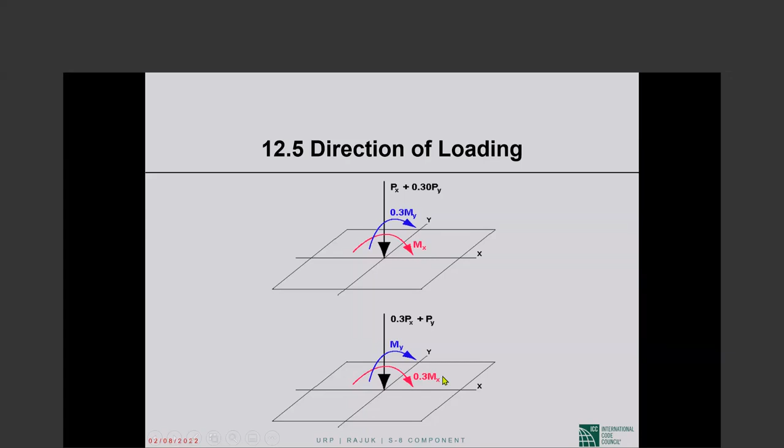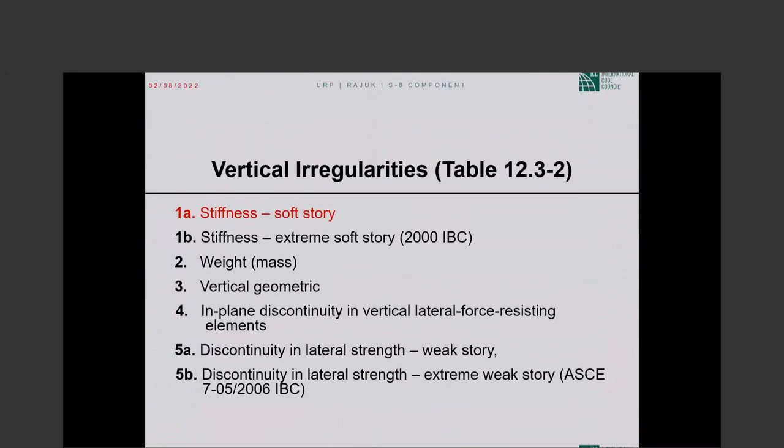So this orthogonal effect is kind of serious, but there are important exceptions that I will not go into today, so it's not as bad as it looks. So orthogonal combination procedure, that is one way to go. Or the other thing you can do is simultaneous application of orthogonal ground motion.

So linear or nonlinear response history analysis, time history analysis, with orthogonal pairs of ground motion acceleration histories applied simultaneously. You hit the building with earthquake in the X direction, earthquake in the Y direction, actual acceleration histories, and you do inelastic time history analysis, 3D analysis. Obviously, you have accounted for orthogonal effects very directly. Cannot go wrong with that.

Okay, so that is the end of the discussion on horizontal irregularities 1 through 5. We now come to the vertical irregularities, starting with soft story.

The definition of soft story irregularity is soft story stiffness smaller than 70% of the story stiffness above, or 80% of average story stiffness of 3 stories above.

Now, the soft story does not have to be at the bottom, as shown in the picture. Quite often it is, but many times it isn't. So soft story stiffness is less than 70% of story stiffness above, or 80% - this is or, not and - of the average story stiffness of 3 stories above.

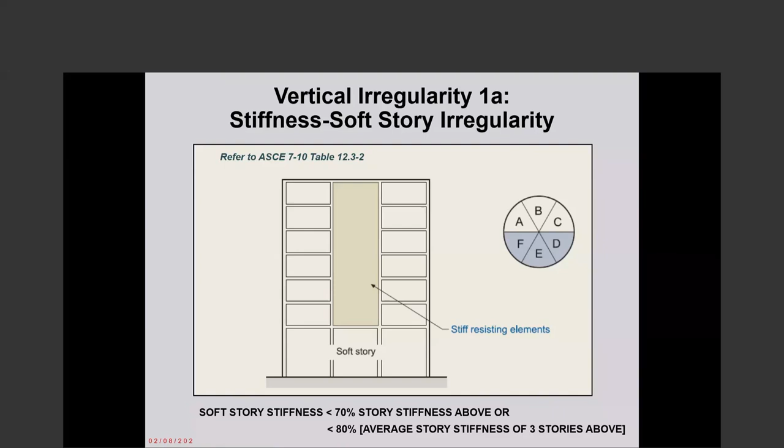After the war, everything was scarce, and the Japanese built structural steel shapes into concrete, which were discontinued at some point along the height of the building because steel is expensive, and they felt that they did not need all the stiffness up there where the displacements expected were not large.

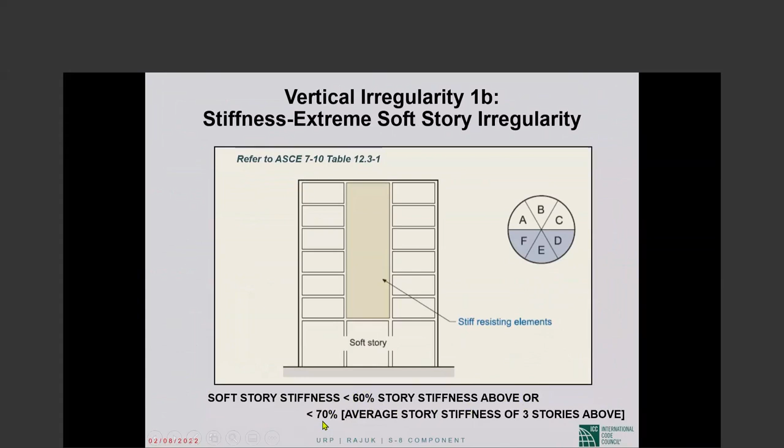Extreme soft story: soft story stiffness lower than 60% rather than 70% of the story stiffness above - this is not and, or - or 70% rather than 80% of average story stiffness of 3 stories above. This irregularity, extreme soft story, is prohibited in design categories E and F, so obviously you are not bothered by that. Also, the permitted analytical procedure - you have to do dynamic analysis. Nothing else is triggered.

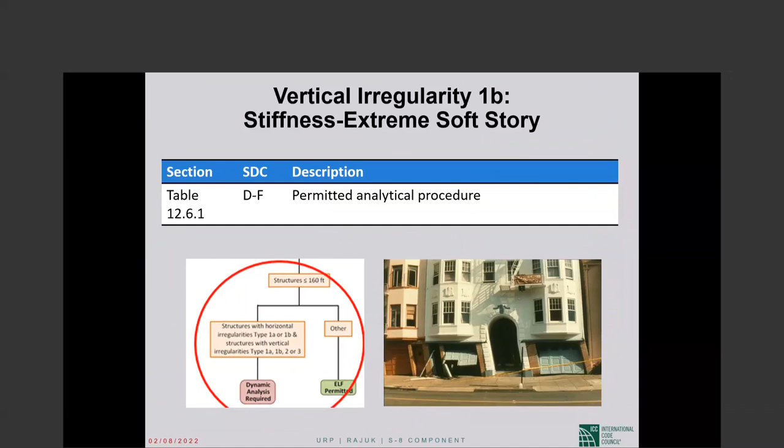Vertical type 2, mass or weight irregularity.

This has been deleted from ASCE 7-22, not there anymore, but that doesn't change anything for you.

Anyway, the definition is story mass larger than 150% of adjacent story mass. Story mass at any story, whichever story, is larger than 150% of adjacent story mass.

In this case, the roof is exempt. A roof that is lighter than the floor below need not be considered under this irregular category.

If you have this type 2 vertical irregularity, mass irregularity, then the only thing triggered is permitted analytical procedure. Type 2 vertical is one of the bad irregularities that was mentioned yesterday.

Now, this is something I felt compelled to include because this will get you out of many binds. I have found it very useful. Please follow me carefully, even though it has been pretty long already. This is going to be important, I think, for you in your professional life from time to time.

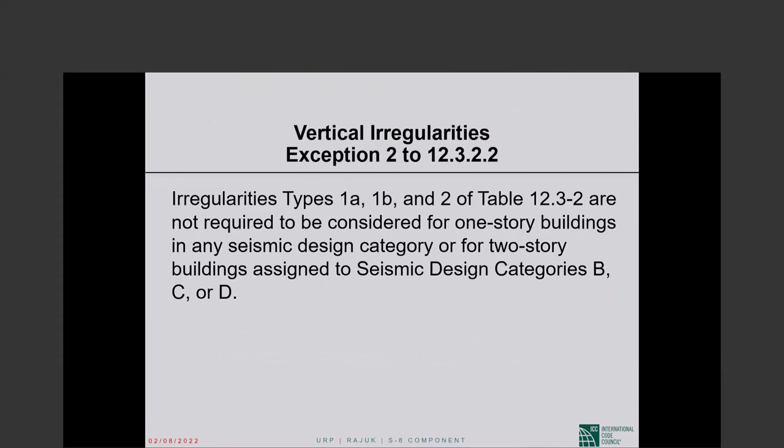Irregularities type 1A, 1B, 2 are not required to be considered for one-story buildings in any seismic design category, or for two-story buildings assigned to design category B, C, and D. This is an outright exception.

This thing that I said is important. It gets you out of many binds. So 1A, 1B, and 2 do not apply when no story drift ratio under design lateral seismic force is greater than 130% of the story drift ratio of the next story above.

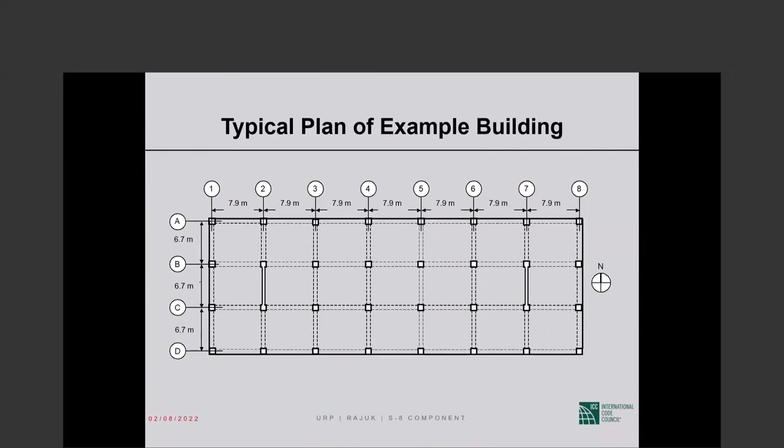So the bottom story is 4.9 meters, the next story 3.7 meters. The stiffness ratio is 1 over 4.9 cubed versus 1 over 3.7 cubed, which is 0.42. That being less than 0.6, we have an extreme soft story irregularity type 1B.

So we have vertical irregularity type 1B, which will require dynamic analysis.

Now, the exception that I mentioned: vertical structural 1A, 1B, 2 do not apply when no story drift ratio under... So what it means is delta sub E1 over H1 — delta sub E is elastically computed deflection at floor level 1 divided by height to floor level 1 — is less than 130% of the interstory drift of the story above. That would be the elastically computed deflection at floor level 2 minus elastically computed deflection at floor level 1, divided by the story height of the second story.

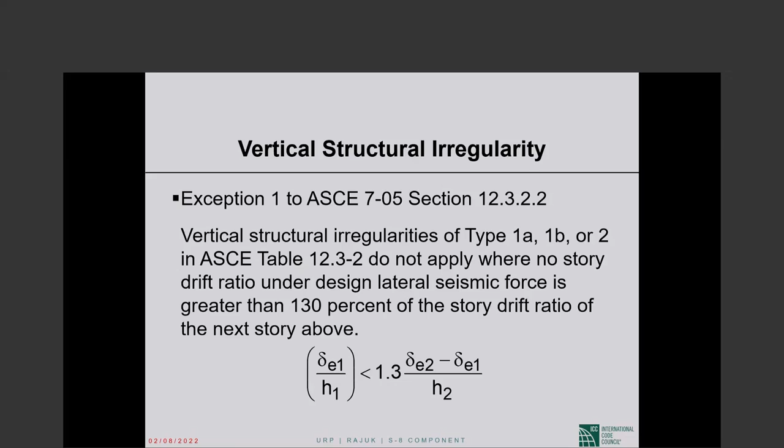I'd like to write these things down in order to... Anyway, so the interstory drift in the lowest level is delta E1. That divided by the story height has to be less than 130% of the interstory drift of the next level above, which would be delta 2 minus delta 1 divided by the story height, which is H2.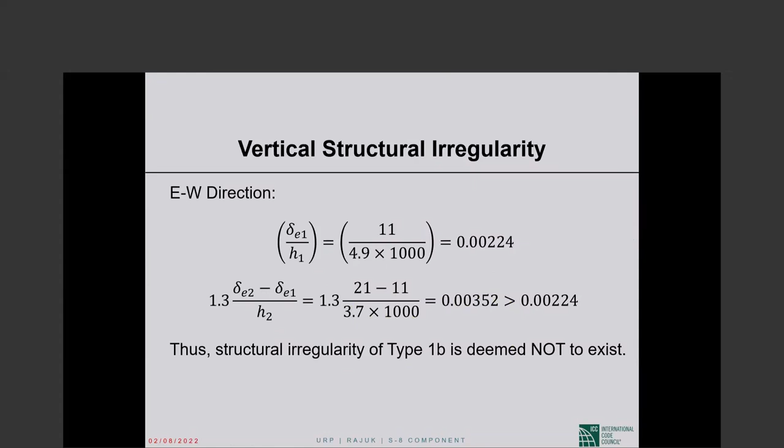So we can do equivalent static analysis for this building. We don't have to do modal response spectrum or anything like that. Okay, so please pay attention to this exception and the example.

This is FEMA's rendition of mass irregularity type 2. This exists if the effective mass of any story is more than 150% of the effective mass of an adjacent story. I think I can skip it, this is just another representation of what we went over already. FEMA comes up with pretty good graphics and simple language, this is why I included it.

Vertical type 3, vertical geometric irregularity. Horizontal dimension of the lateral force resisting system, not the building plan, the lateral force resisting system, that is what's important. So if the horizontal dimension of the lateral force resisting system in a story is larger than 130% of that in an adjacent story, then vertical type 3 is triggered.

This is FEMA's rendition, same thing. If you have vertical type 3, that is also one of the bad irregularities, and you will have to do dynamic analysis. You have to go to this table, and the table will tell you that you have to do dynamic analysis. Vertical type 4, in-plane discontinuity.

This is not an out-of-plane offset, but in-plane. So this was coming down, and then it doesn't continue, it is discontinued. There is an in-plane offset of a vertical element.

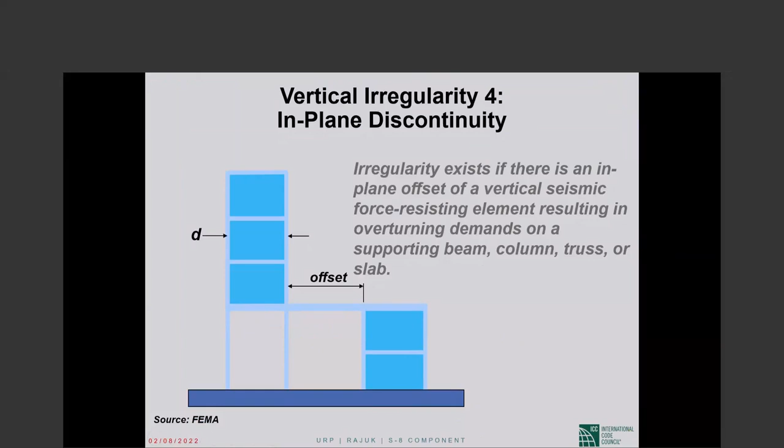I think the FEMA picture is better. An in-plane irregularity exists if there is an in-plane offset of a vertical seismic force resisting system, resulting in overturning demands on a supporting beam, column, truss, or slab. So if that happens, there is overturning demand on this beam, the transfer girder. This is the definition of vertical irregularity type 4.

If you have type 4, then the ASCE 7 provisions that are triggered are the overstrength factor for elements supporting discontinuous walls or frames. That's a very important requirement that gets into the picture. Then, 25% increase in seismic forces in connections, diaphragms, and collectors. And then the permitted analytical procedure for type 4.

Actually, type 4 is not one of the bad irregularities. So when you go to this table, it will require dynamic analysis only for taller buildings exceeding 160 feet in height, or the table will tell you that you can do the equivalent lateral force procedure.

Vertical type 5, weak story irregularity. When we say soft story, it is about stiffness. When we say weak story, it is about strength. So weak story lateral strength is basically the sum of the shear forces that can be resisted by the columns and shear walls in the building. That's the simplest way to think of lateral strength, how much shear can be resisted by the columns and the shear walls.

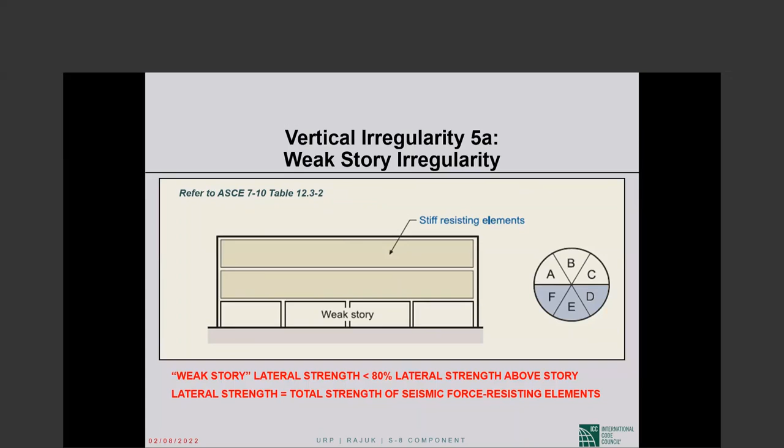This is prohibited in design categories E and F, which do not exist in Bangladesh, only D. You have to go to this table of permitted analytical procedures and figure out if you have to do dynamic analysis. You may or may not have to.

Vertical type 5b, extreme weak story. Now the weak story lateral strength is less than 65% of the lateral strength of the story above.

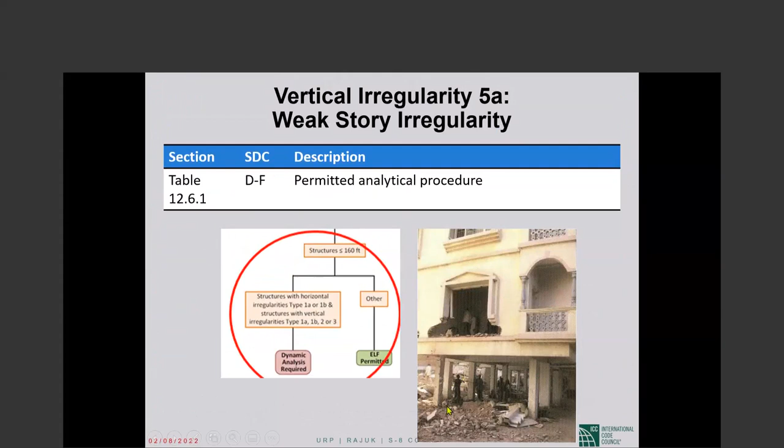This is, as I said, the worst of the worst. I showed you this picture earlier without commenting on it, this is from Bhuj, and there's hardly any difference between it and the other picture. This one is in India. This other one, I don't even remember the place, anyway these are all over the world. So this one, extreme weak story, is prohibited even in category D.

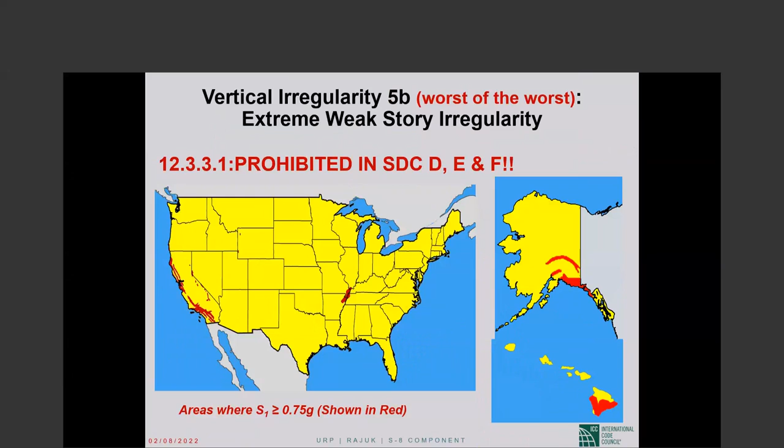Okay, please take note that this is something you cannot build. There is a bit of an exception. Structures with vertical irregularity type 5B as defined shall not be over 2 stories or 9.1 meters in structural height. So it is not that you cannot build it taller than 2 stories or 30 feet, but there is an exception to that.

The limit does not apply where the weak story is capable of resisting a total seismic force equal to omega sub 0 times the design force prescribed in section 12.8. So the story is weak compared to the upper stories, but it is very strong compared to the lateral forces that have to be resisted. If it is capable of resisting that force, or if you strengthen your columns to that extent, then you don't have to live with this height limit of 2 stories or 30 feet.

This is FEMA's rendition of the 5A and 5B irregularities. And that brings me, so it is not too bad. I concluded when this was supposed to conclude today, more or less. So now I'm open to questions. There is almost a half hour left. It's not bad.

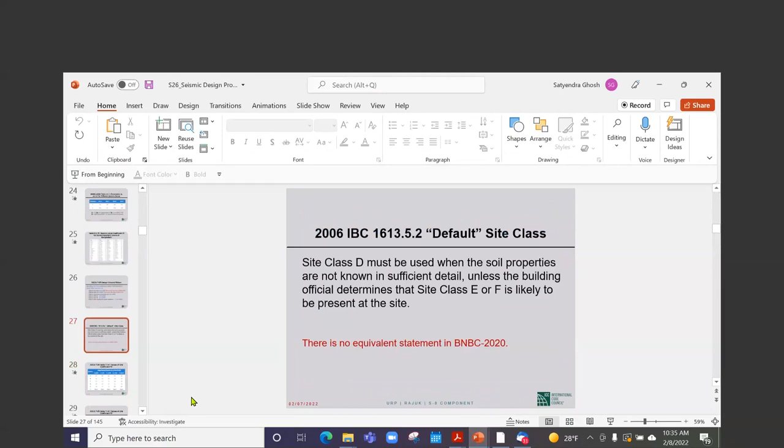Did I shut it off? Yeah. I heard that question. This is what the question is on. No, I will tell you which slide. Yeah, this one, this one. Okay. I do not know. Yeah, these are the values in BNBC, so it's not mistyped or anything. I think Dr. Abedin would be the one who knows. He has 3 lectures coming up, and I can ask him if you remind me, Bodhi, I'll send the question to him. Yeah, Dr. Ghosh, that's what I was telling you yesterday - the first time when we were preparing this presentation, we had the very same question, and you probably asked someone at that time. So I do not remember.

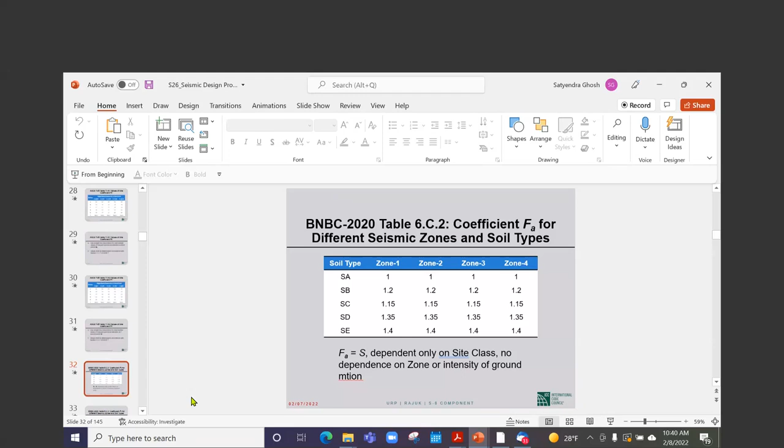Okay, moving on. So vertical irregularities 5B in SDC D, E, and F are prohibited by the code. But if, due to architectural reasons or the owner needing something, that leads to vertical irregularity, how do we go around that? No, you have to read it from the beginning. So the question is: vertical irregularity 5B in SDC D, E, and F are prohibited by the code, but if due to architectural reasons the owner needs something that will lead to vertical irregularity, how do we go around that? I don't know. Okay, so I think I kind of understand the question.

Your question is about type 5B, when I say prohibited in D, E, and F. But it's really not prohibited - you cannot go beyond 2 stories or 9.1 meters. The answer is, if your architect must have a taller building that has irregularity type 5, you have to take advantage of this exception: you have to make the weak story strong enough to resist omega sub 0 times the design force. That's the way out provided in that exception.

Then I went over some of the questions myself. Sound problems, I think these are fine. After a point, I stopped. I will start from here then.

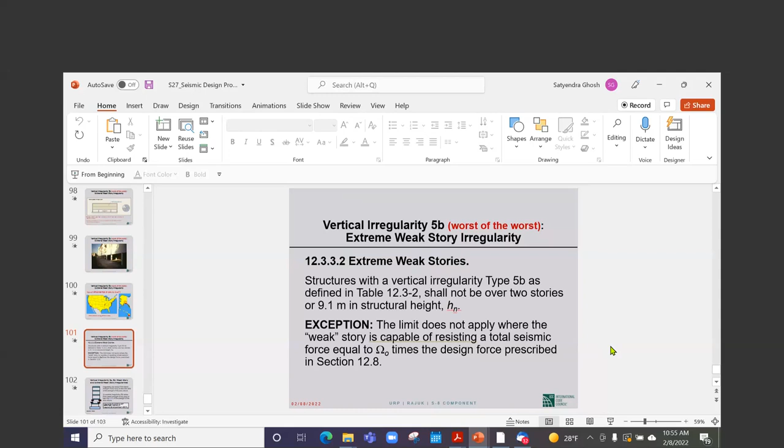He's saying that Gazipur is in seismic zone 3, but why is the seismic zone coefficient 0.2 in table 6.2.15 for Gazipur? So he's saying that the table is different from the map - the map is showing Gazipur in that area. Yeah, this is very specific, probably. No, it can be specific, but I would be very surprised.

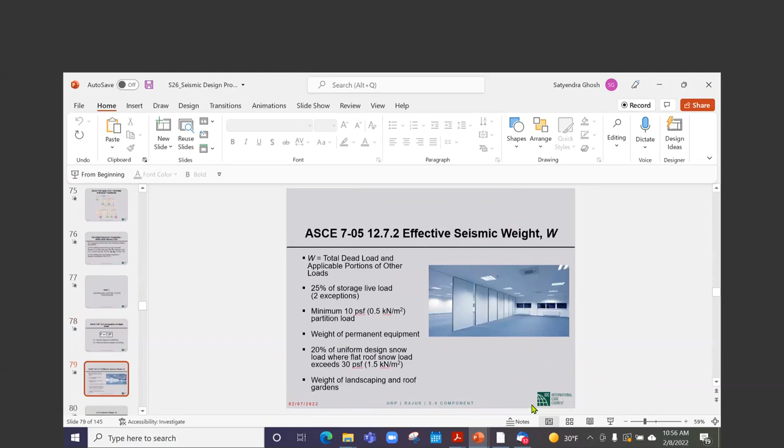Point 2 is zone 2. He's saying Gazipur is shown in zone 3 on the map. Let me check. Yeah, part of it is shown, a small part of it is shown in zone 2. If you're looking for the slide number, it is 51, Dr. Ghosh.

Gazipur shown on that, yes. Let me see... no, yeah, I see Gazipur. I don't know from that writing on what side of the line it is, there's no point or anything marked. So it is showing Gazipur district, I think. The table is talking about Gazipur, the town or the city, and if they have said point 2, I would assume that the town itself is in zone 2. So I think that's what is happening.

I think it is called the district of Gazipur, and this map shows the entire district. The town of Gazipur is probably somewhere here on the other side of the line. So if it is the town of Gazipur, I would go with the table. If it is somewhere else in the Gazipur district, then you will have to locate it on the map. Okay, Dr. Ghosh.

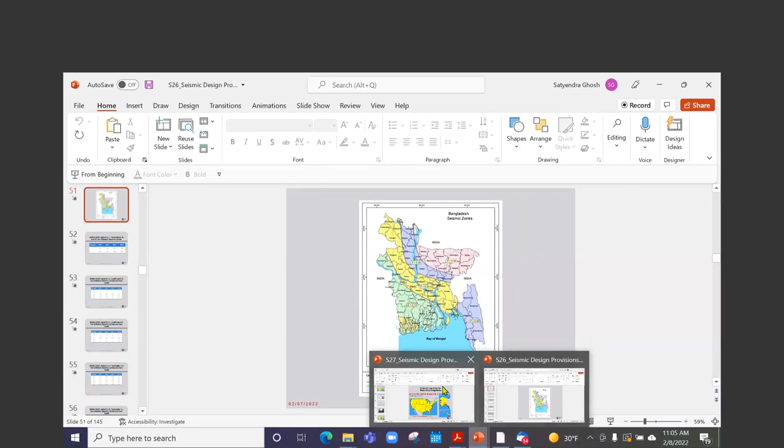There shouldn't be any difference. Let me see, one second. I'm also checking. No, this is the wrong one. Now let me look.

No, this is a very good question. I want to make sure before I answer. When we show deflection in the picture, that may have been loose. Let me see. Story drift - yeah, so story drift is right. It is not deflection. There is no difference between ASCE7 and BNBC.

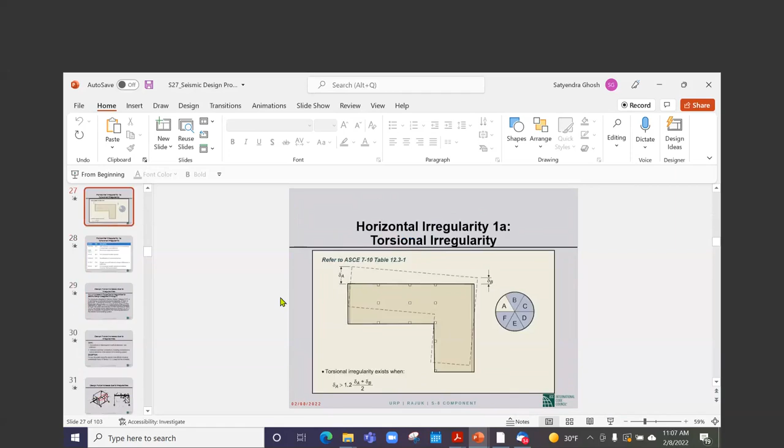We probably should not have used the lowercase delta. We did not mean to. Yeah, I think that's a very good point that came out. We should change those to uppercase delta, interstory drift. Okay, yeah, this is very good that it came out. Yeah, as I said, we kind of did it loosely, not thinking.

Yeah, these questions have been answered in the presentation. Any building has been... There are a lot of questions, Dr. Ghosh. Yeah, it's hard to go over each and every question, but a few are very fundamental, like fundamental frequency and stuff - very fundamental things. Even if you're not aware of these topics, a simple Google search will give you thorough information. So response spectrum analysis will be covered afterwards. Irregularities have been covered in today's presentation, so I'll skip that.